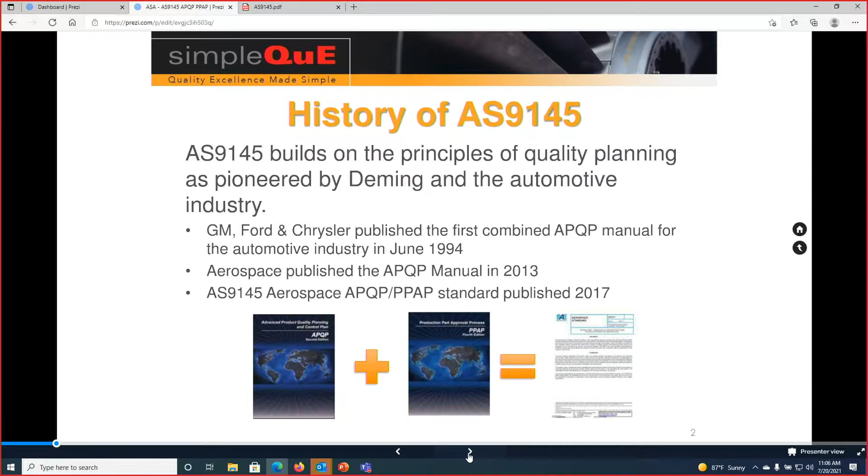The automotive industry's been using these tools for over 25 years, and many other industries use APQP and PPAPs because it's good practice. It's been around a long time. The aerospace industry had to come up with their own because of the lower volumes, the higher regulations, and we know aircraft can fly for many decades, so there's unique differences that needed to be accounted for with the aerospace industry.

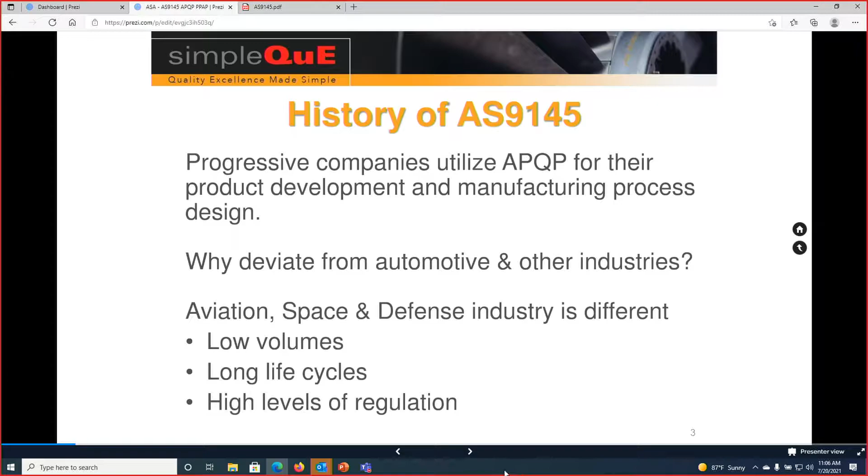So what we want to accomplish in this webinar is give you a basic understanding of APQP, Advanced Product Quality Planning, and talk about who's asking for it in the industry, and give you an understanding of the relationship between what aerospace is doing versus automotive. There's a lot of free information out there, and I'll be going through that in this presentation to give you some free tools, free training, further training, and a lot of the details. So that's what we're looking at to accomplish.

When we talk about advanced product quality planning, the purpose is to provide a structured approach with expected outputs, records, to show that you're proactively working product development and process development life cycle using cross-functional teams, and ultimately gaining value and being more proactive in the new product development process.

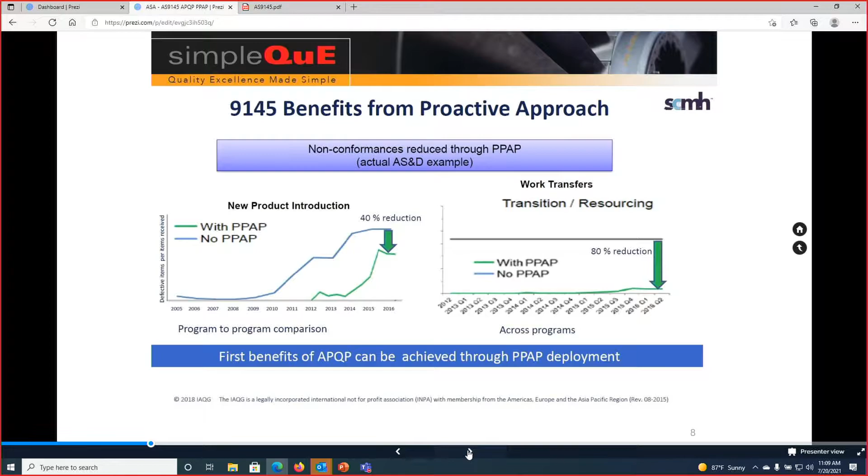And then on the right-hand side, when they were doing work transfers and requiring PPAPs when they transferred work, they saw an 80% reduction in problems, rejects. So there's great value and proven history. This is an aerospace example. The automotive industry's seen similar results by being more proactive and using a phased, structured approach.

Ultimately, this results in more successful new product launches, and it makes the customers happy. Fewer problems, reduced waste and warranty issues, help managing risks.

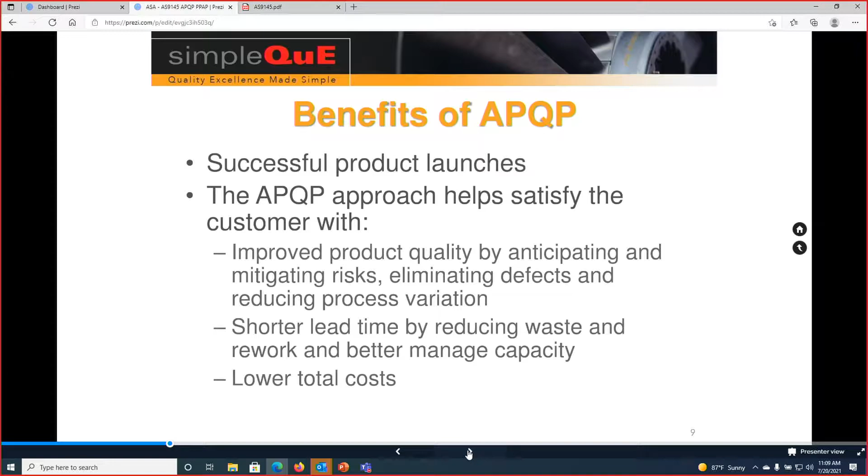So other benefits of the APQP process: making sure that we understand the customer's expectation and ultimately meeting their requirements, but also taking out costs and having a more robust process for new product development and also manufacturing process development. And when we do things from a planning standpoint, more proactive standpoint, we have fewer changes because we're doing it right the first time. And ultimately, these are all benefits that we see out of this process.

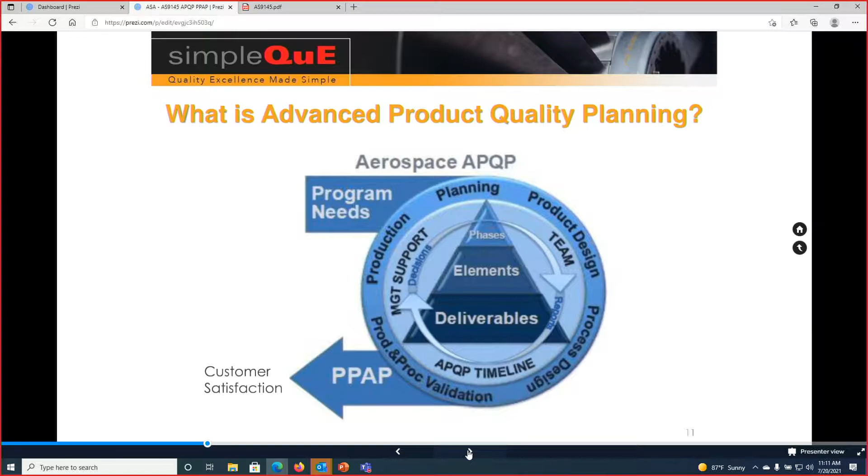So breaking this down a little bit deeper here with the pyramid, there's 5 phases to the APQP, and for each of these phases there's expected elements that will exist, or activities that will occur. And from each of these phases there are some key deliverables that will end up in the PPAP package.

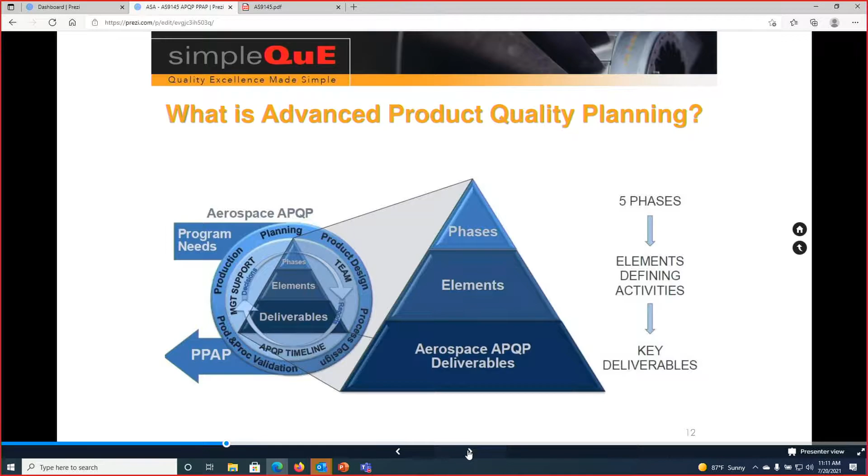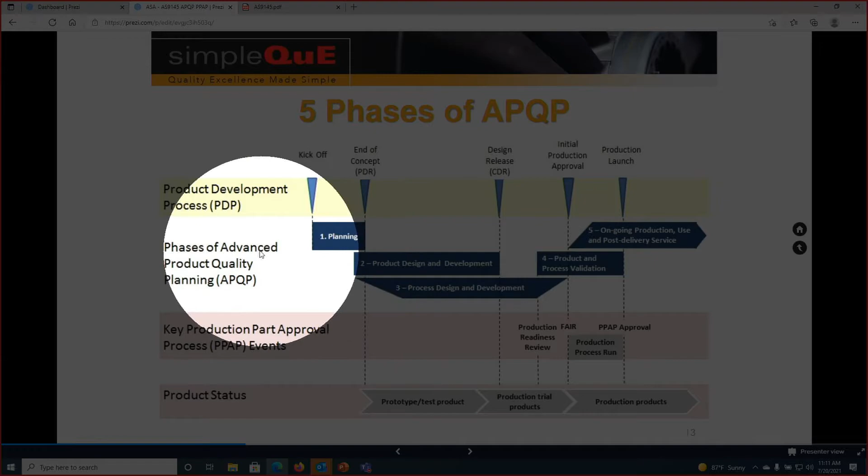So when we look at this a different way, we see the 5 phases of APQP: planning is the first phase, product design and development is the next, process design is the third, the product and process validation is fourth, and then production is last, and post-delivery. So those are the 5 phases, and we can see, going left to right from a timeline perspective...

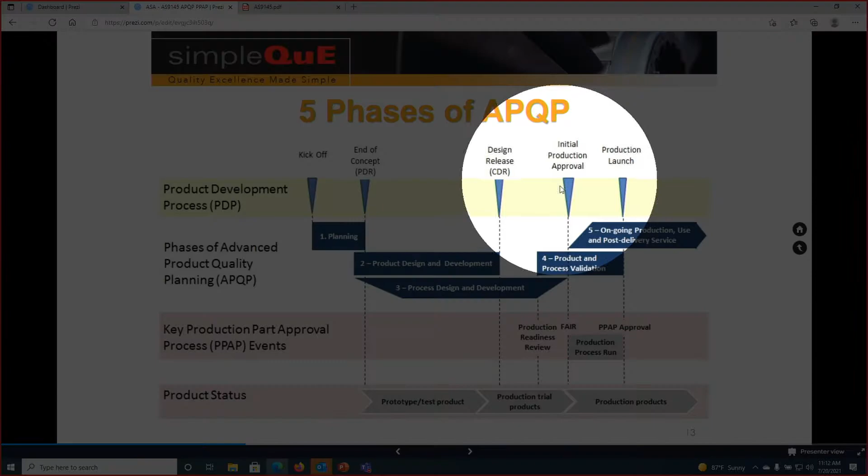The concept from new product development, the preliminary design review, all the way down into the product launch. We see the different levels here, where at the bottom the PPAP is occurring at the tail end, where we're looking at the validation. Going right before we go into full production is when we do the PPAP and deliver that to the customer for approval, so that we can go into mass production.

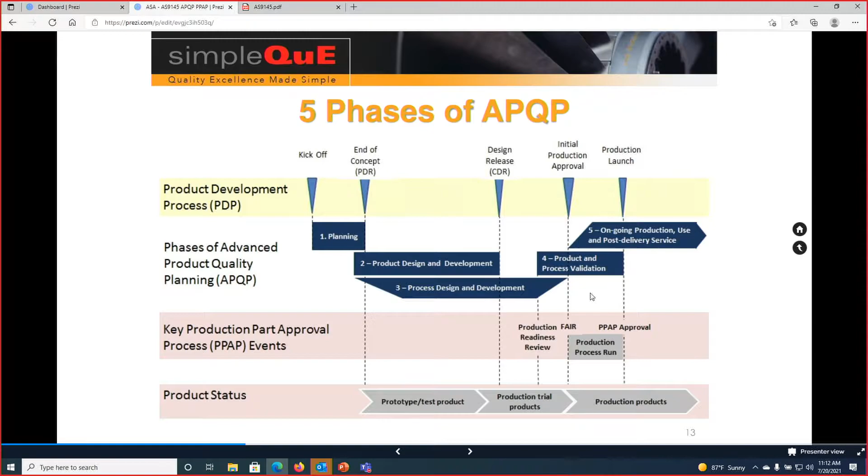There is a lot of information in the Supply Chain Management Handbook. There's a couple of slides, if you're not registered, that'll go through and tell you how you get to some of this information. But there's a lot of information here on the Supply Chain Management Handbook with APQP.

We see a bunch of webinars. These are all recorded, free webinars going through the different elements of APQP. There's some guidance documents and a lot of tools and templates for doing APQP and some of the key deliverables. So it's a great resource, free information. Recommend that you check it out if you haven't.

But what I'm going to be going through in this webinar is going through these 5 phases and what are the expected deliverables out of these phases.

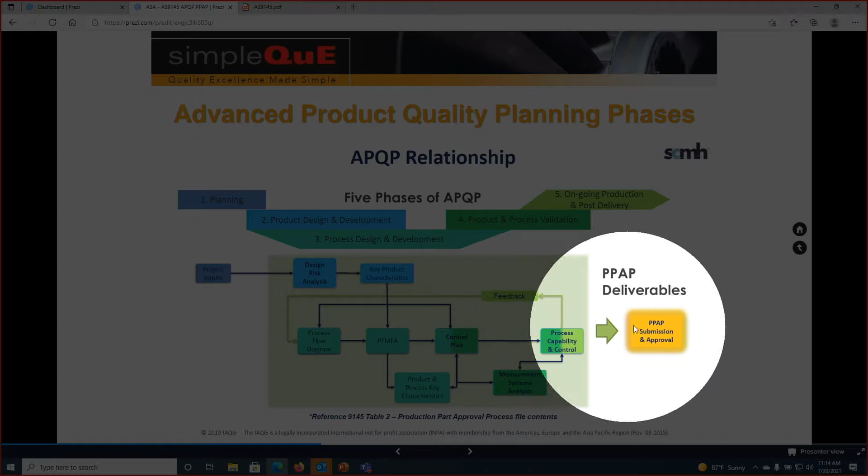So as an example, with the planning, we have inputs for the project, but on the design side, there's going to be a design risk analysis, identification of any key characteristics, and as we get into the process design, the manufacturing process design, we're going to have a flow diagram for the manufacturing steps, like Operation 10, 20, 30, the process failure modes and effects analysis. So we're going to go through this in a little bit more detail to give you a little bit more awareness of some of the elements that are ultimately going to end up in the PPAP package deliverables and what has to be submitted to the customer.

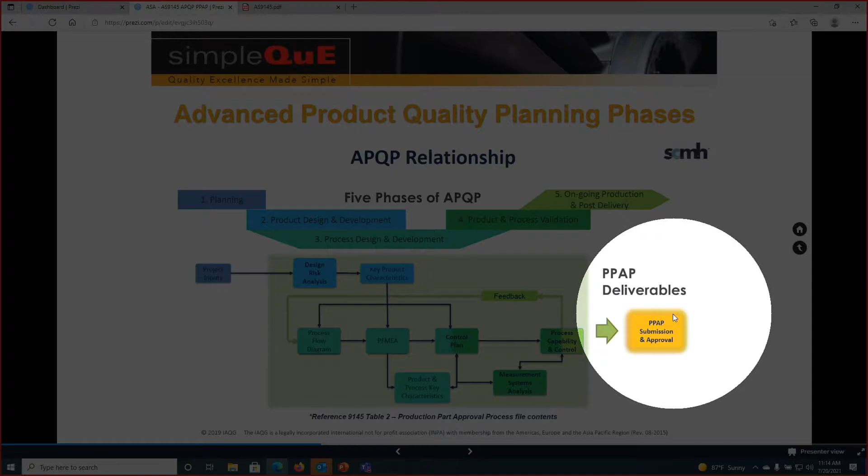So this first phase with planning, what I have in bold type are expected records, and what's just normal type are just typical elements that you might find in the planning phase.

And then in the next slide you'll see some red type, and that'll show you what's going to be required in the PPAP package. But for companies that don't design products, some of these items won't apply. The expected pieces that you'll have for this planning phase will be less if you don't design a product. If you're just making to print, there'll be less pieces here.

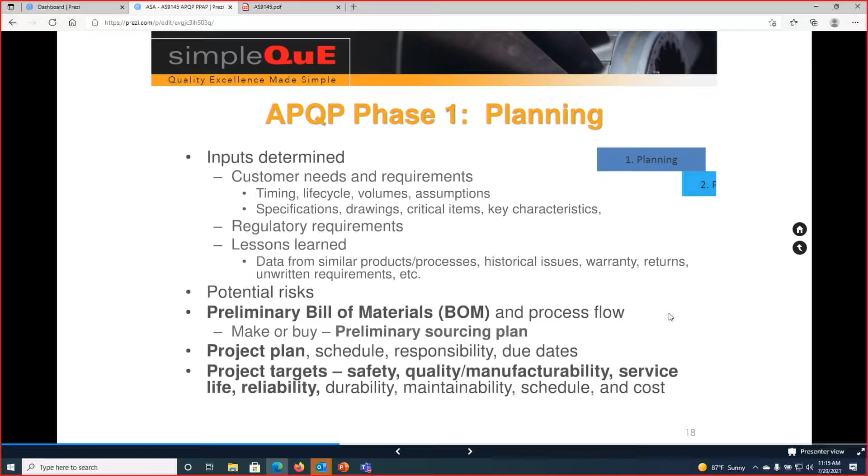So the second phase is designing of the product. I'm not sure how many of you are designing product, but if you do, there's a requirement for design risk analysis, which would be a design FMEA. That's the first deliverable in the PPAP package. The failure modes and effects analysis, and I've got a couple slides to go through that here in a second.

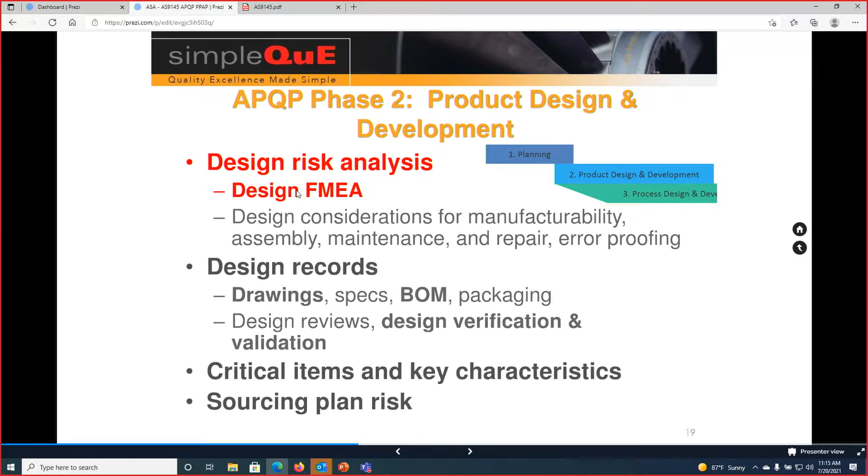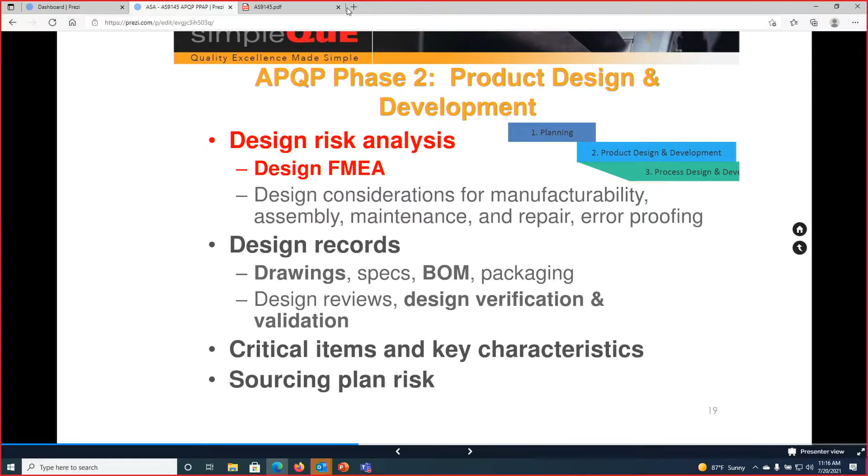But there'll be design records that are expected, drawings, specs. Critical items and key characteristics important in the aerospace industry for more complex products. And these are things that we would expect to see some kind of records for. If you're making parts to print, these would be identified to you by the customer on their drawings or specs.

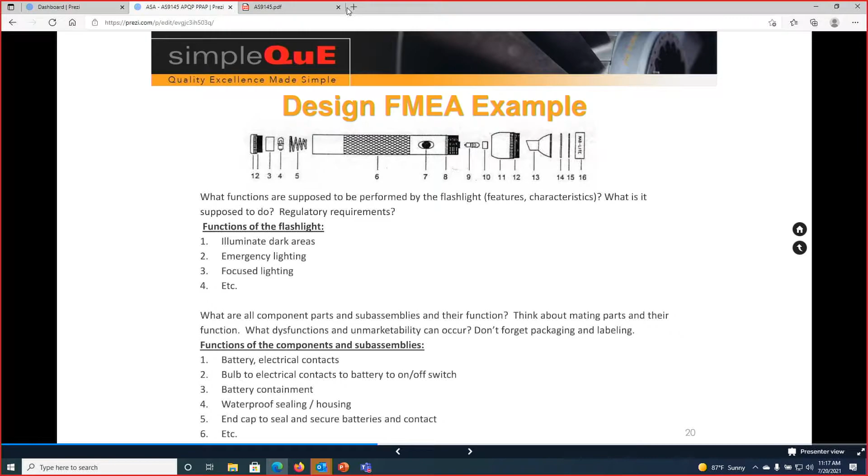All right, here's an example of a design FMEA. Looking at this flashlight, this mag light, they're wanting to see from a design perspective, what is it supposed to do? What's the function? What's the primary function of the flashlight? And then looking at each unique part, you can see the 16 parts in this flashlight. The design FMEA will look at part number 1, part number 2, part number 3, look at how it can fail, and then look at the components and subassemblies, how parts 1 and 2 go together, and 3 is a rubber bushing, 4 is a spare bulb and the spring, and how those go together into the housing number 6, and looking at the functions and the subassemblies issues that could occur there, and then populating that into a template.

So this design FMEA template looks at the function - the function of the flashlight is to illuminate a targeted area or a dark area, or direct the light at a source. So this design FMEA template will look at, well, what can happen for the flashlight not to function. It just doesn't work.

Or if the flashlight has partial function, or if it has intermittent function, or loss of function over time, or unintended function, and then it looks at the potential causes of those failures and how serious those might be, the severity, and scores the severity, looks at how likely those problems could occur.

And applies a score of 1 to 10 on the likelihood of occurrence, and then looks at our ability to detect this in the design and or prevent it in the design, and we come up with a detection score on 1 to 10.

So we multiply the severity times occurrence times detection and come up with a risk priority number to evaluate whether the risk is acceptable or the risk is too high and we need to make some changes to mitigate those risks or reduce those risks.

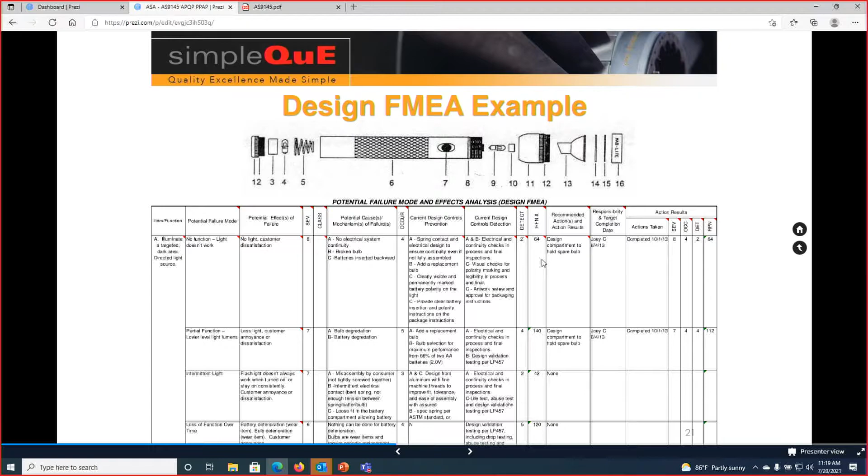So these are great tools for helping to identify and understand when a risk is okay as it is and we don't need to take any action, and then when those risks are too high and we do need to do something.

All right, the third phase gets into manufacturing process design, and as we're making product, we have to plan, and especially if it's a new product and we have to put in a new production line or new equipment, there's a lot of planning that they want to see from a proactive standpoint, starting with what's this line going to look like?

What is the process flow? What's operation 10? What's operation 20? What's operation 30? What's the floor plan look like? And then they want to see a process failure mode and effects analysis, similar to what we just looked at on the design side.

Again, the bold type, the black bold type are expected outputs or records that they would want to see. So if there's any key process characteristics, and then the red items are what has to go in the PPAP package.

The control plans are developed at this phase as well, and what we want to see is the flow diagram feeds into the process FMEA, which feeds into the control plan, and I have a chart on that in a second.

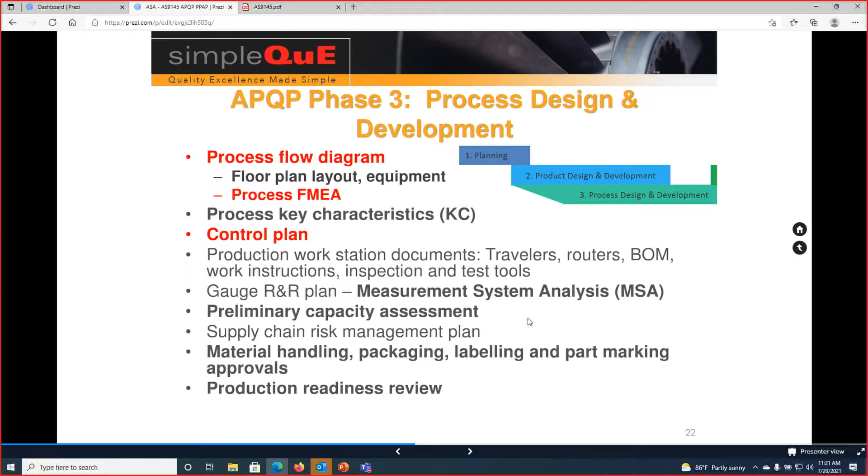And then we see, we could have gauge R&R studies, capacity assessments, supply chain risk plans, all of this proactive planning.

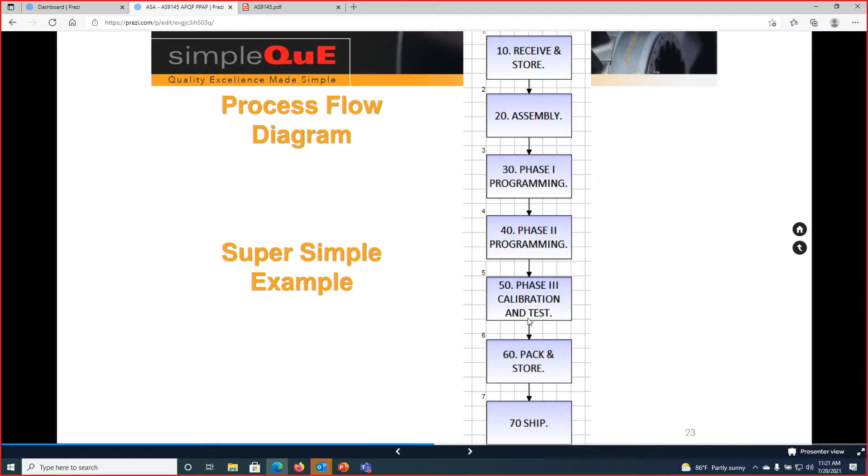So process flow diagram, one of the outputs that they want to see in the PPAP package could be as simple as showing operations 10 through 70 here, from the receiving of the raw materials to the shipping of the product is the starting point and the ending point of what they want to see in a process flow diagram.

In the supply chain management handbook, this is one of the templates that they provide, and I like this template because again, it's operation 10, 20, 30, 40. Each row here is different steps, and then they break down whether it's an operation step, a setup, a move, a store.

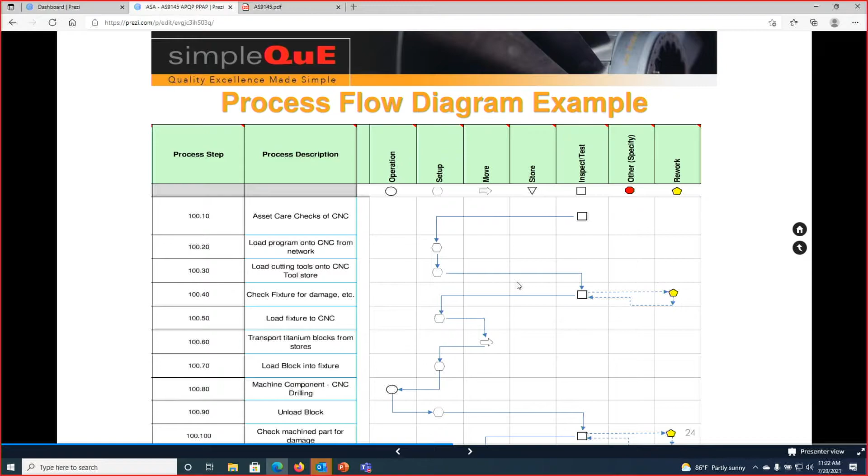But I really like showing this when there's in-station rework. So here we have an inspection and test, and then if there's a problem, they can rework it, and it's part of the process flow, and you can see that. I like that in this template. Too many companies don't account for the in-process rework steps in their manufacturing production processes.

The process FMEA template looks very similar to the design FMEA, but it's a different structure where it looks at each process step, operation 10, operation 20, operation 30. And in operation 10, it wants to see what can go wrong, what are all the potential problems and the effects of those problems.

But then we get into the causes and look at the severity, the occurrence, the detection, and come up with a risk priority number. And when the risk priority number is too high, we have to come up with subsequent actions to help manage and mitigate those risks.

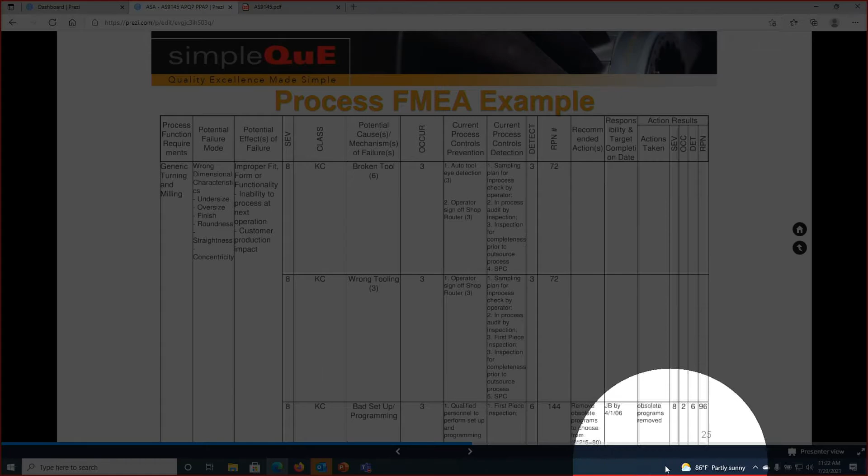And so this is a proactive tool in the design of your manufacturing process to say, hey, we've identified something that could occur, the risk is too high, and we need to do something to manage that risk or to reduce that risk to an acceptable level.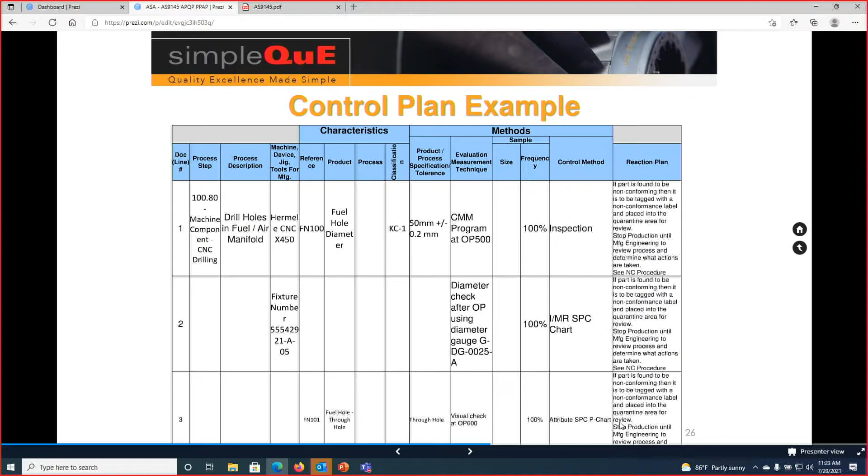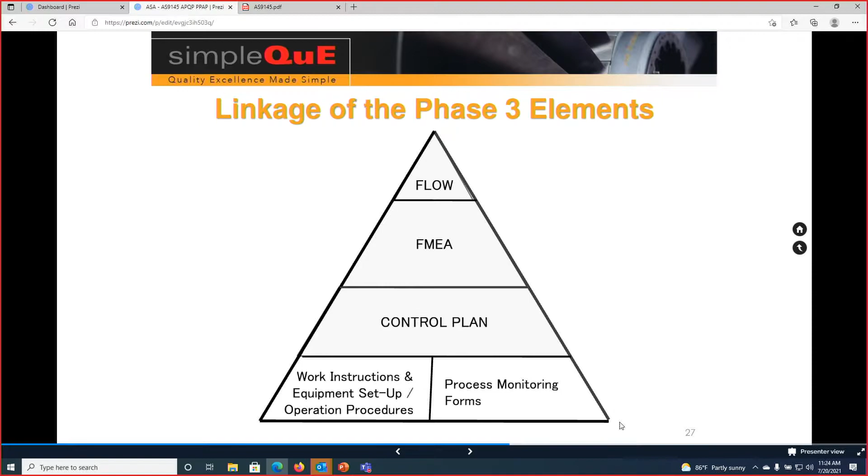I talked about the linkage flow diagram feeding the process FMEA, feeding the control plan. All of those are planning tools to create better, appropriate work instructions, setup instructions, and inspection and test templates and forms. Using those tools in planning really helps drive more effective production work instructions, setup instructions, and inspection and test tools.

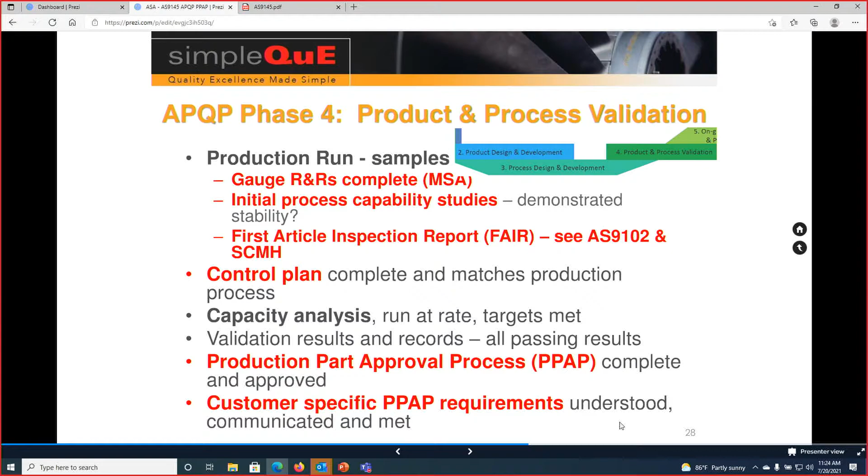The fourth phase of the APQP is validation of the product and validation of the process. Here we do gauge R&R studies, also called measurement system analysis. Process capability studies, where we have key characteristics or critical items that the customer may identify. We may have to do SPC to show that we can make products within statistical capability. We also have our FAIs, first article inspection reports, as referenced in AS9102. Control plans we talked about, and all of this builds up into the PPAP package.

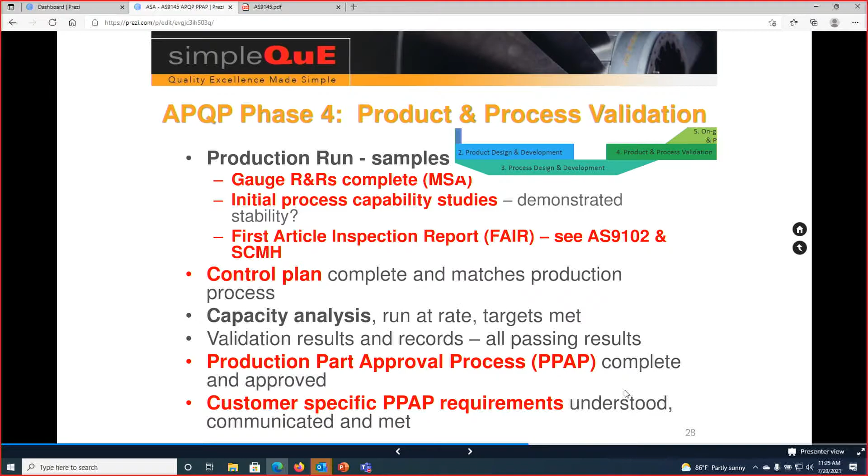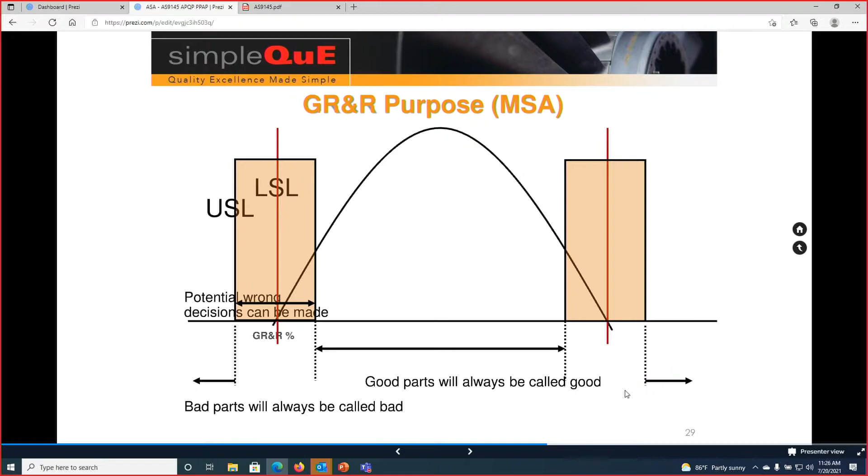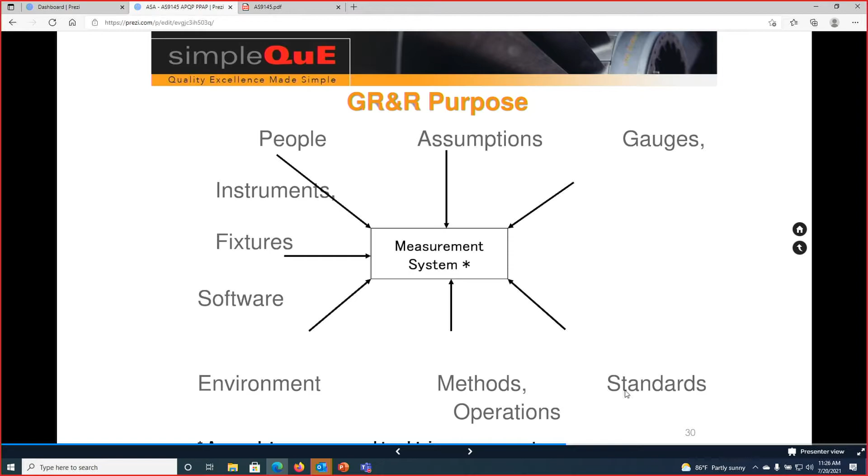Gauge R&Rs - I probably have too many slides on this, but once you design a manufacturing process and a product, it's hard to design the variability out. When we look at measurement techniques, there's variation in the people and variation in the gauge, and we want to make sure we call a good part good and a bad part bad, and never make bad decisions by calling a good part bad, or worse, a bad part good. Gauge R&Rs are important because they take into account all of these variables in the measurement system and the usage of the gauges.

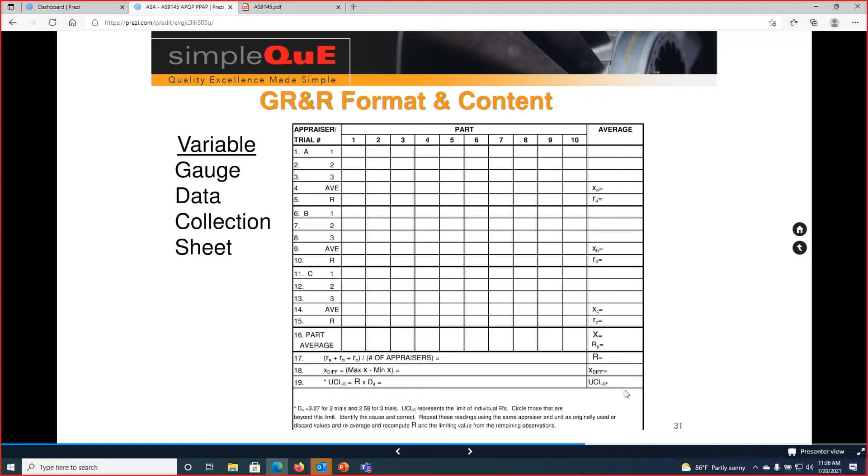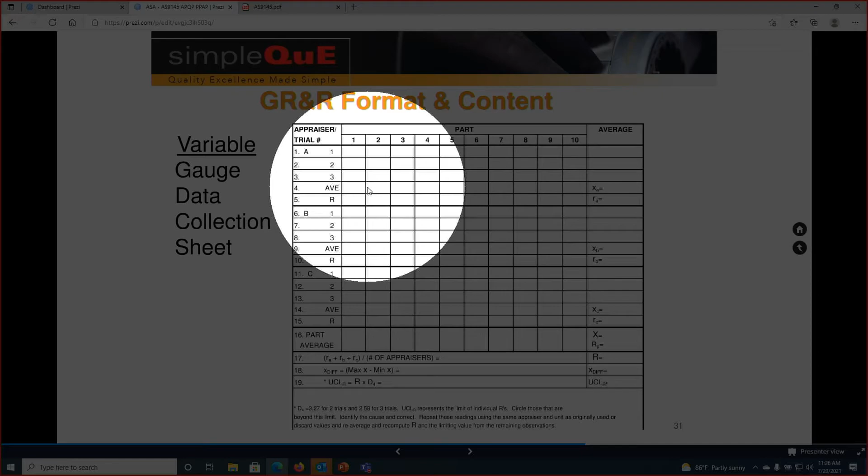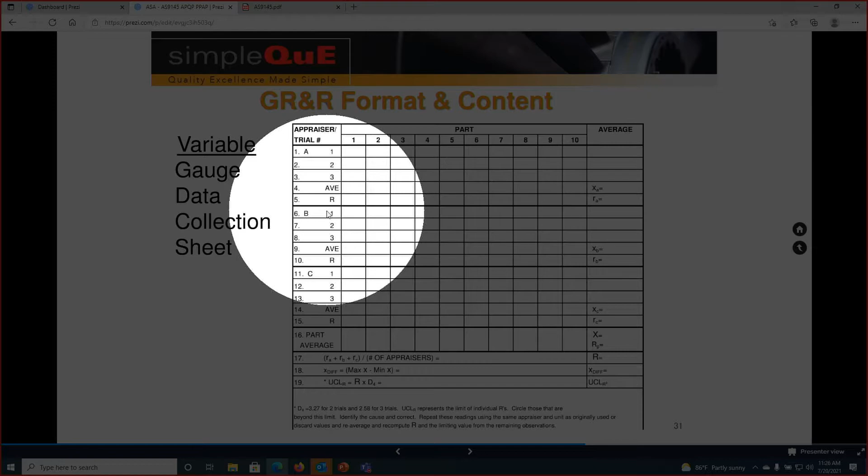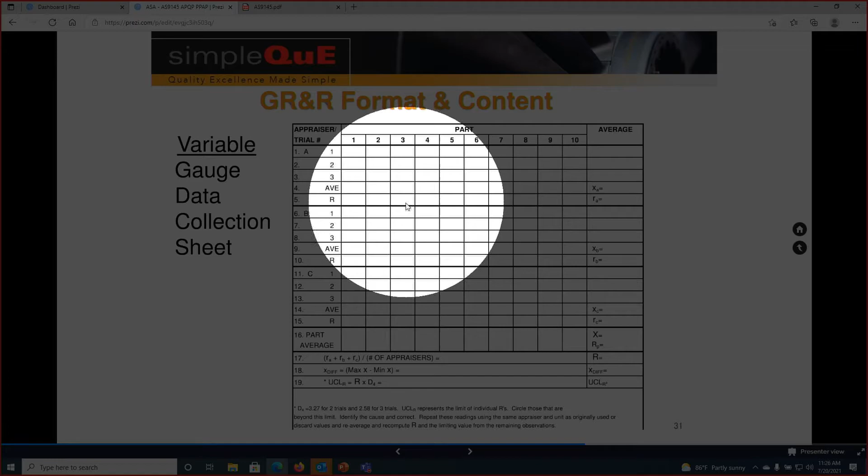This is a template for a gauge R&R study for a variable gauge, using up to three operators looking at 10 parts, measuring parts 1 through 10 two or three times. You could do a shorter study, with 2 operators versus 3, or measure the 10 parts 2 times instead of 3 - it just affects the numbers and statistics behind the gauge R&R.

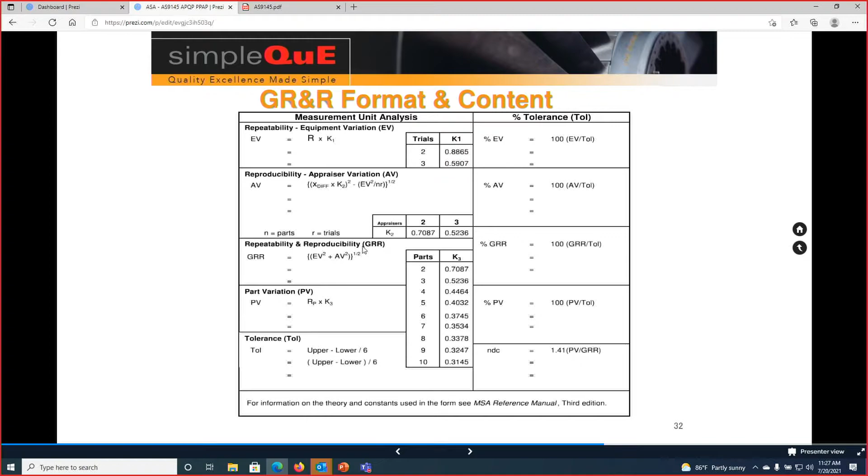Ultimately, you come up with a study that produces a gauge R&R percentage, looking at the variability in the equipment, the variability in the operator, and also the part variation. What we want to see is a gauge R&R under 30, ideally under 10, and there are other factors behind this we don't need to get into.

They also want to see, with attribute gauges - pass/fail, go/no-go gauges, check fixtures like mylars or layouts with boundary samples - that different operators look at about 20 or 30 parts in 2 trials and get consistent results, catching the bad samples using the gauge, making sure they're calling a good part good and a bad part bad. If you're using Minitab or other software, there's much more sophistication behind this, but these are very simple templates and tools that can be accepted by the customer for an attribute gauge R&R. These will be on our download website.

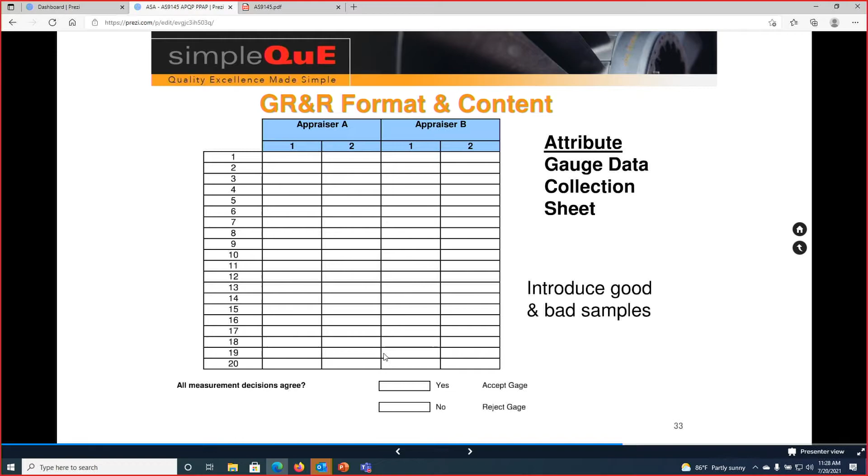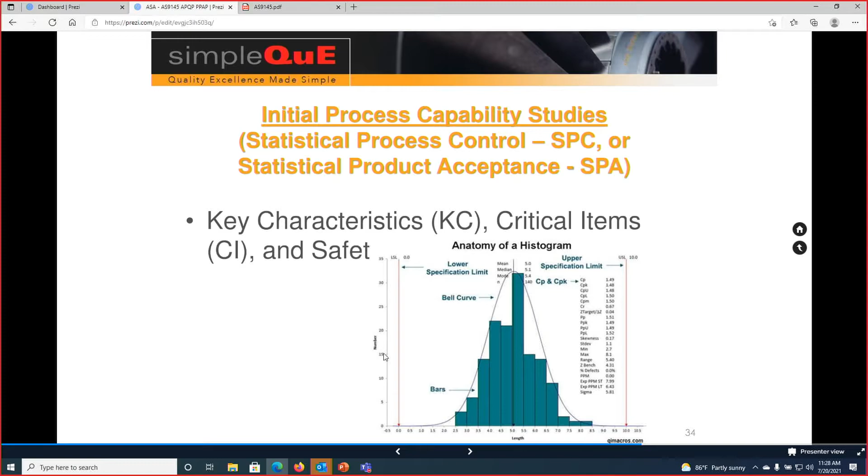Process capability studies involve statistical process control for any key characteristic identified by the customer, or critical items that are safety critical, mission critical, flight critical. They just want to see that we're statistically controlling and managing, and can make parts consistently within spec to an acceptable variability.

Ultimately, when you're submitting this paperwork along with parts to the customer to approve you to go into production, they're going to either approve the PPAP and say, yep, you're full steam ahead with production, or they may give you interim approval where they say, this is fine, except we saw this process capability on this characteristic and we didn't like it. We want you to be tighter. Work on that and resubmit.

Or they're going to reject it and say, we don't—they'll tell you why they're rejecting it, for whatever reason. But those are the dispositions that you get back from the customer.

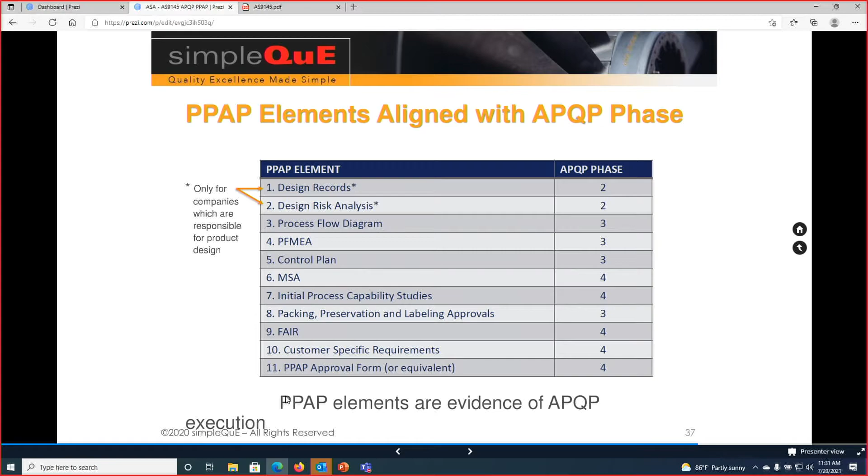And then the last phase is production, and ultimately we want to see that we can make product to the appropriate quality levels and the appropriate process capability, and that we can make the right quantities that we targeted for, and we can deliver on time.

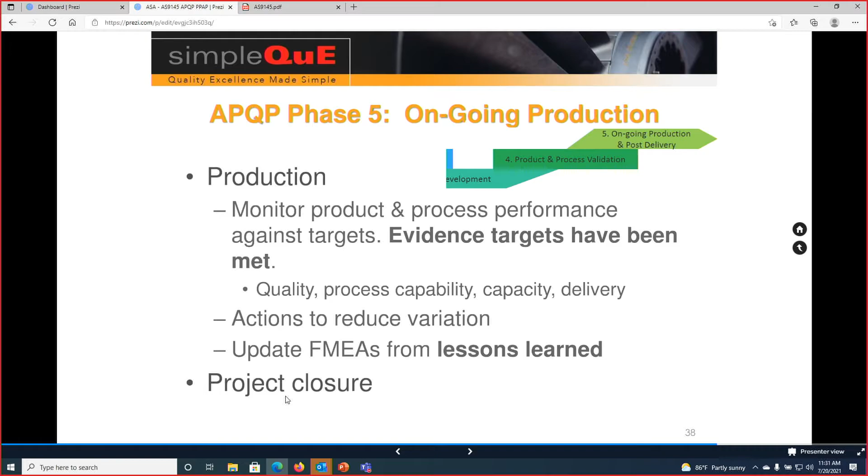So the project then gets closed out, and then we get feedback, and we may go back and adjust the FMEAs and the control plans based on feedback that we get from the customer after the product's in production. So it is a cycle that comes back.

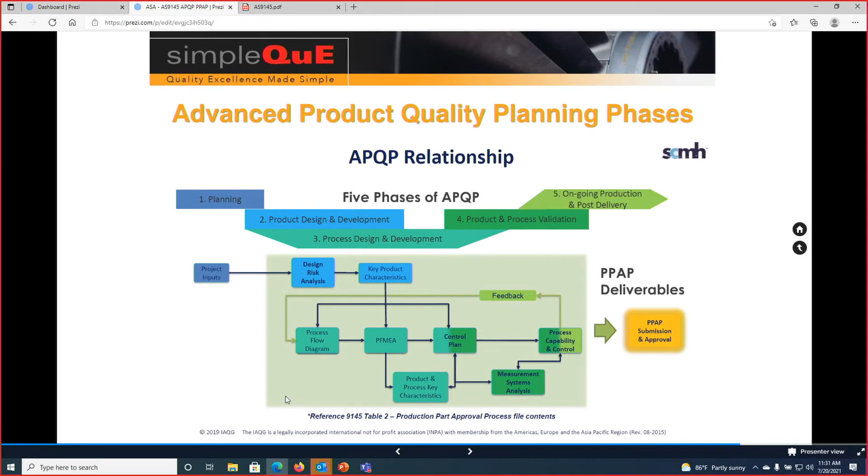But this lays out the 5 phases, the key deliverables of the PPAP at the bottom part of this chart, and hopefully that gives you enough information at a high level, and you can go get more training on the specific elements if you need more information or training.

Now, the aerospace industry, I really like this—different from automotive, the aerospace industry has been using a maturity model with their suppliers, the APQP maturity model.

This template comes from the Supply Chain Management Handbook, but I've seen in practice some of the primes and subprimes use a much simpler maturity model, basically trying to understand the supply chain risk on how sophisticated they are in doing FMEAs, control plans, and process flow diagrams.

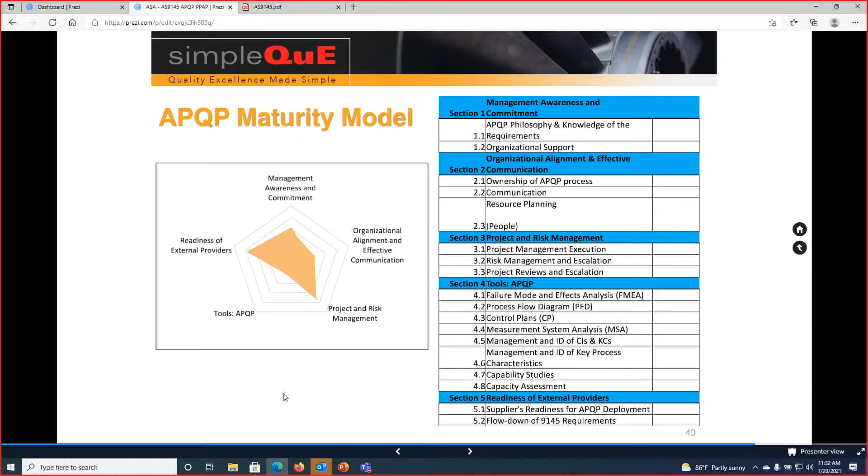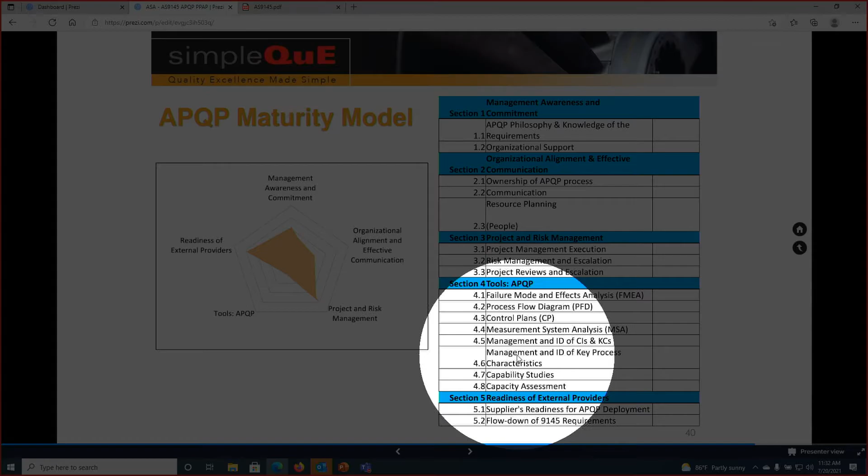And what I typically see is a much greater focus on the usage and sophistication of the APQP tools, and looking at how mature the companies—the suppliers—are.

So as an example, some of the maturity model examples are on the failure modes and effects analysis, looking at 5 levels here.

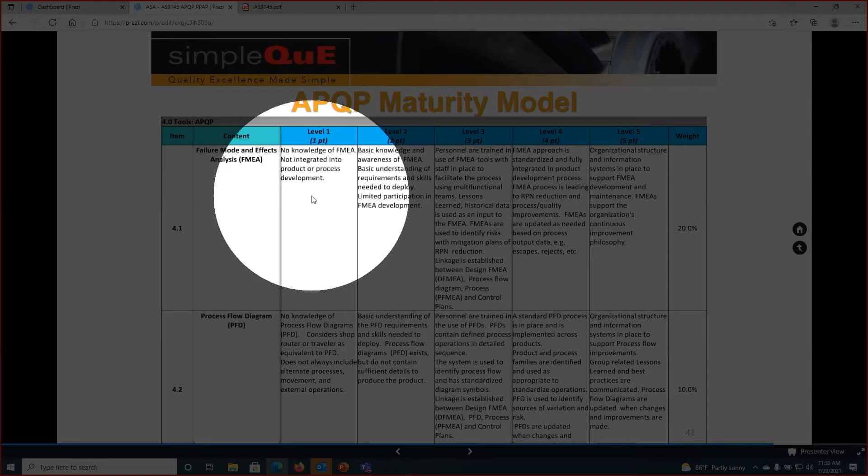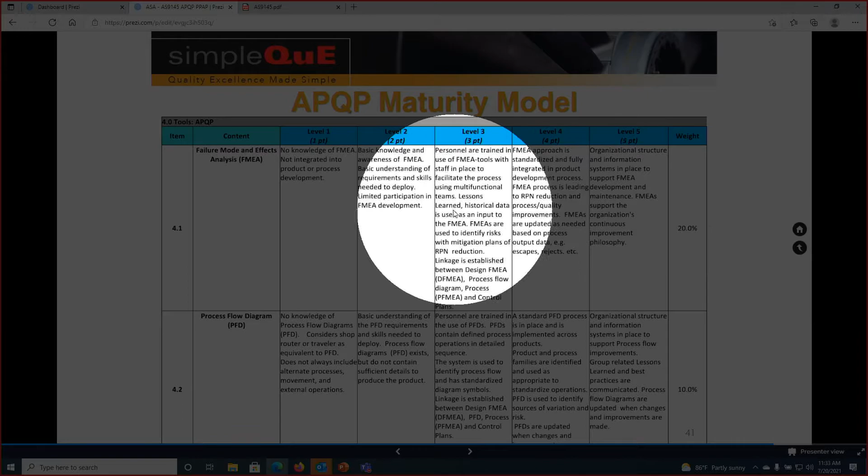The company's not doing any FMEAs, they have no idea what an FMEA is, all the way to they've got a very structured approach in place for FMEAs, maintaining them, updating them, and making improvements over time. So everything in between—same thing with other elements of the APQP.

And looking at the sophistication, the customer can work with the supplier. What I've seen is the supplier will score themselves, and then the customer will come in and score and look at the differences and make adjustments.

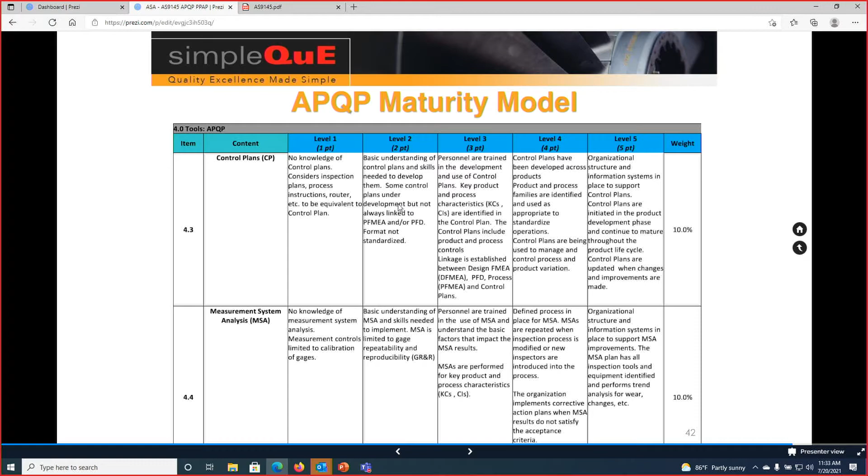But then the customer can also identify this as a supplier development need, or accept the risk and say, yeah, we want you to get better over time. And then they understand their risks about the sophistication of your APQP competency.

So this is the end of the presentation. I hope you've gotten a good understanding of the APQP, and the Supply Chain Management Handbook is great.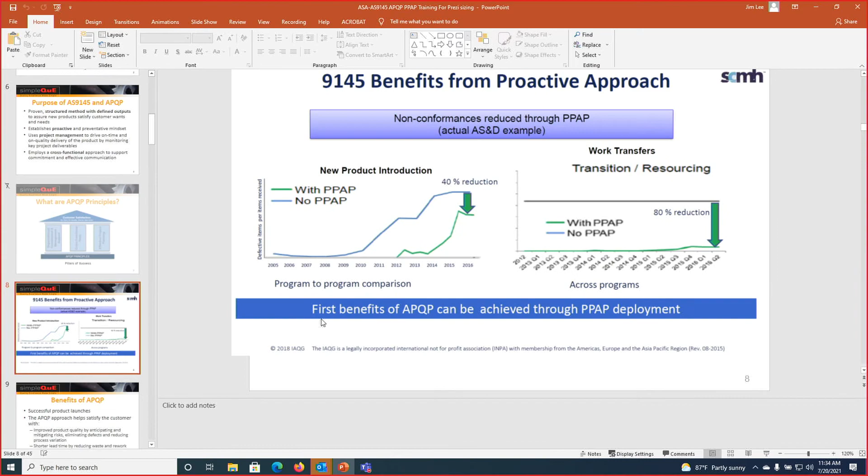There's a different example of an APQP maturity model that's simpler than what's on the Supply Chain Management Handbook. A DFMEA template that's really nice with comments, and a PFMEA template with cells that explain a little bit more detail than just filling out an Excel file. It actually helps you with tips and guidance and ideas, and then a couple of gauge R&R templates. So it's just another tool to look at and consider.

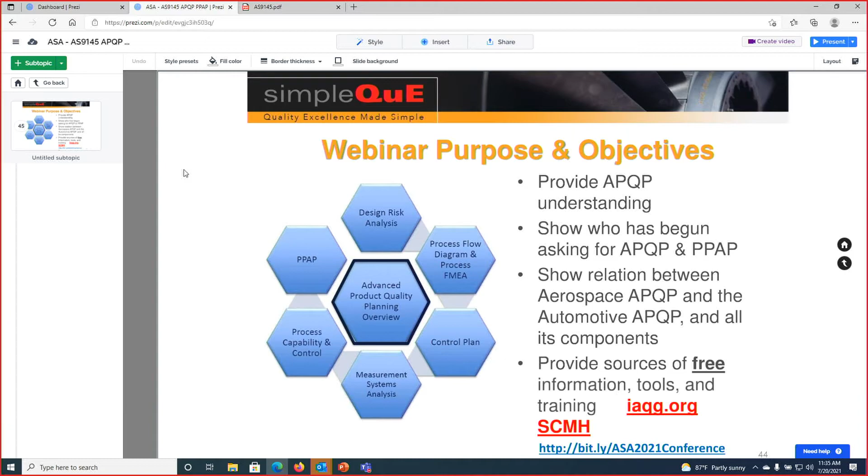Oops, here we go. So that's all that I have. I'll open up the floor for questions. I kind of went through this pretty quick.